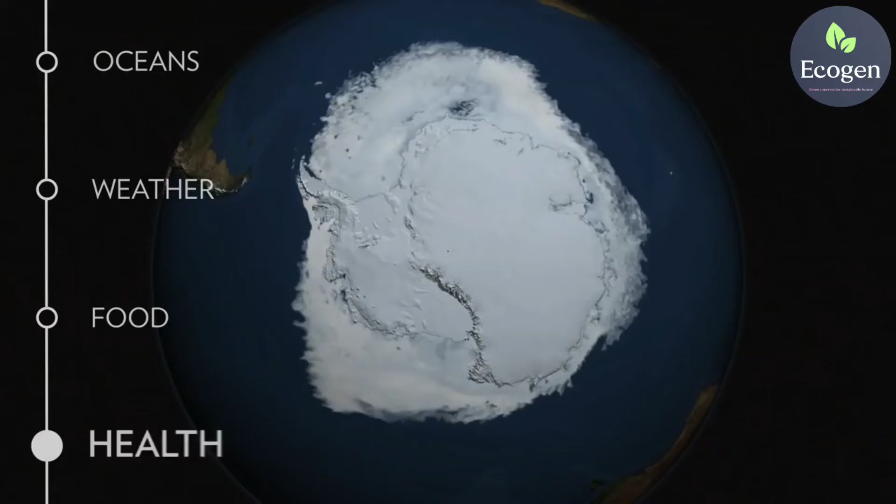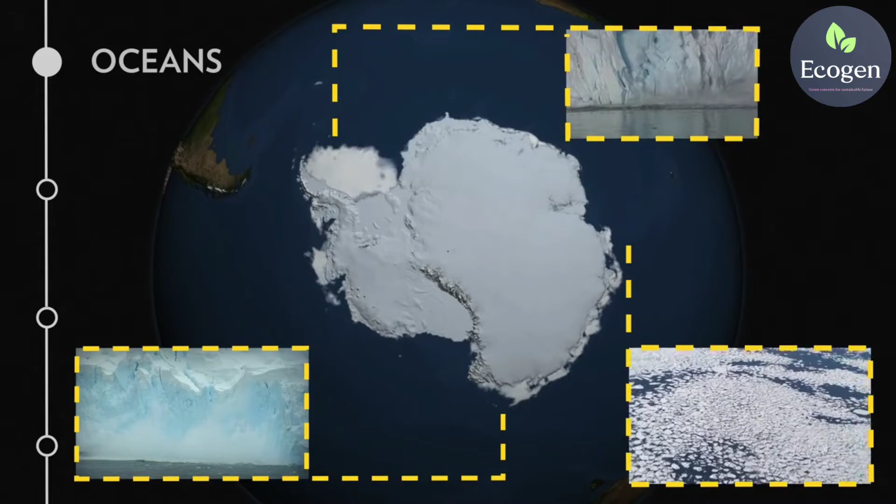Climate change has consequences for our oceans, weather, food sources and our health. Ice sheets such as Greenland and Antarctica are melting. The extra water that once was held in glaciers has caused the sea levels to rise and spill out of the ocean, flooding coastal regions.

Warmer temperatures also make weather more extreme. This means not only flooding but frequent droughts too. These changes in weather pose challenges. Growing crops becomes difficult. The areas where plants and animals can live shift, and water supplies are diminished.

Climate change can directly affect people's health. In urban areas, the warmer atmosphere creates an environment that traps and increases the amount of smog. Smog contains ozone particles that increase at high temperatures. Exposure to smog can cause asthma, heart disease, and lung cancer.

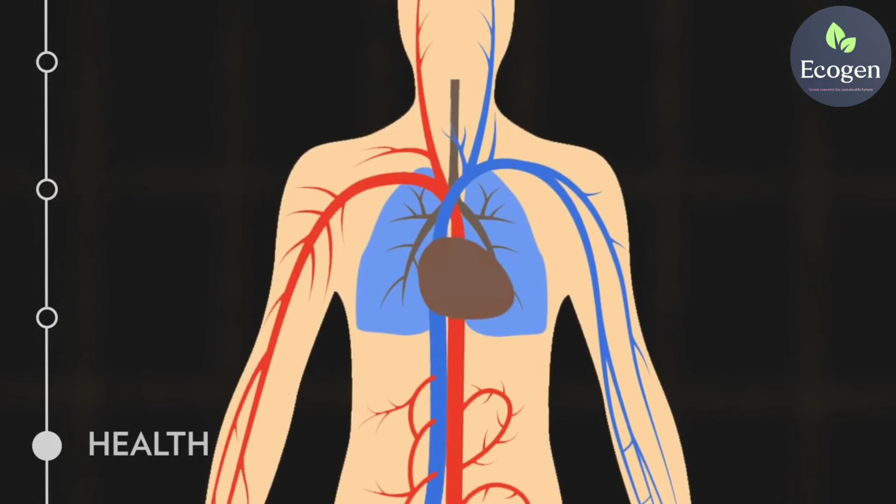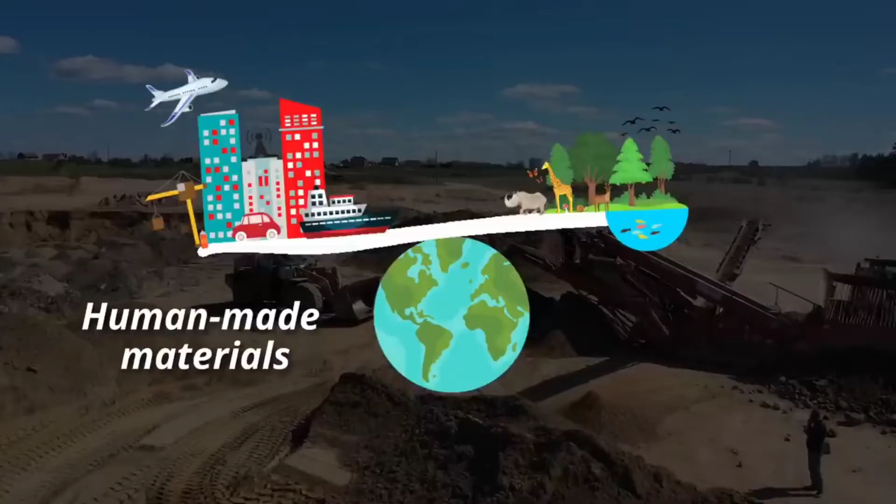A lot of measures are in place to reduce the dependency on fossil fuels and increase green energy consumption, but we haven't much talked about concrete. Concrete is present in all man-made structures and has exceeded the weight of all living organisms on the earth. Cement is considered the heart of concrete and it is responsible for nearly 8% of global carbon dioxide emissions.

Currently, Ecogen has developed mix designs based on the strength requirements. Grades of concrete of M90, M60, M40 have been achieved. Cement and sand are replaced by GGBFS and PS ball when mixed with alkali solution, which is a mixture of sodium hydroxide and sodium silicate.

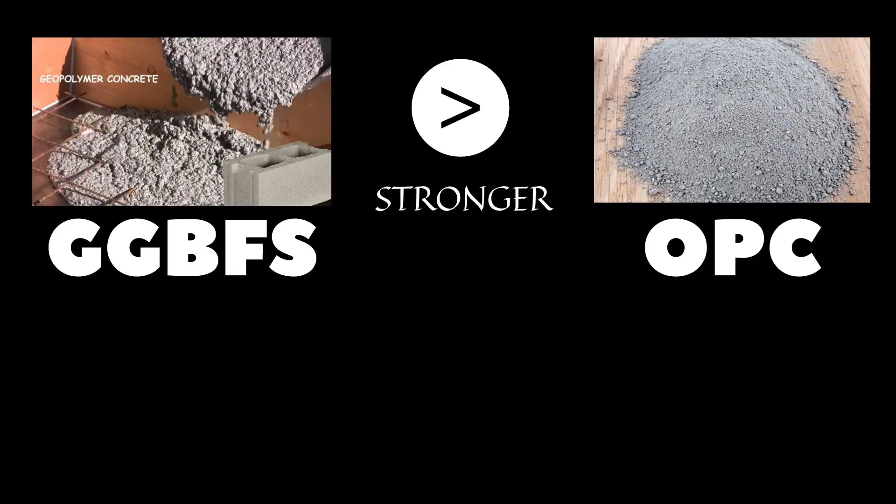GGBFS contains aluminosilicates. When the alkali solution is added, it transforms the aluminosilicate to a 3D network which is bonded by covalent bonds. This is the polymerization process, and that's why geopolymer concrete is stronger than OPC concrete.

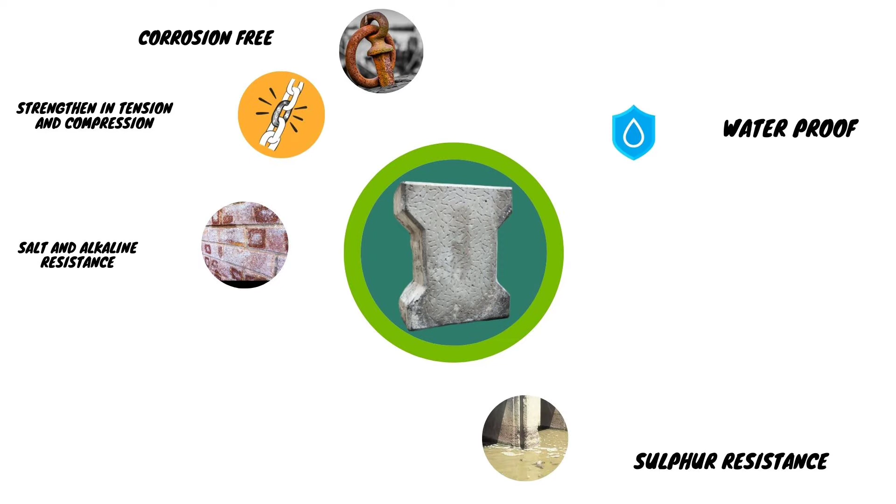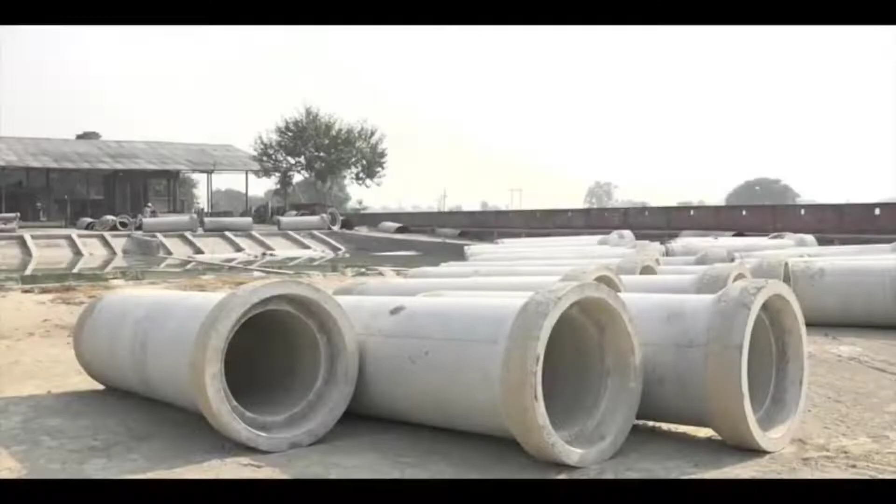Geopolymer concrete has high strength both in tension and compression, is corrosion resistant, alkaline and salts resistant, sulfur resistant, has better waterproof ability than OPC concrete, is heat resistant, has better durability, reduces carbon dioxide emission and mining dependency, and has a greater lifespan, making it a better candidate for sewage and chemical concrete pipes, coastal area protections, roads and pavers, railway sleepers and many more applications. Ecogen is trying to change the way the world looks upon geopolymer concrete.

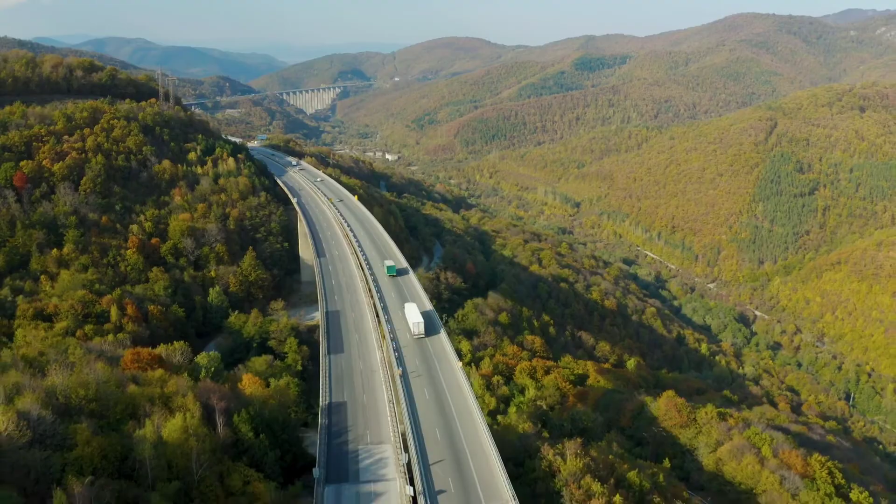We are currently focused on developing an MVP for roads and pavers. Ecogen is the winner of Elevate Call 2 2019 organized by KBITS and the Government of Karnataka and has secured a grant amount to develop a geopolymer product and a pilot project. The project has completed the Tranche 1 plan and the objectives were fulfilled: optimizing the mix design and also finding the optimum dosage of chemicals.

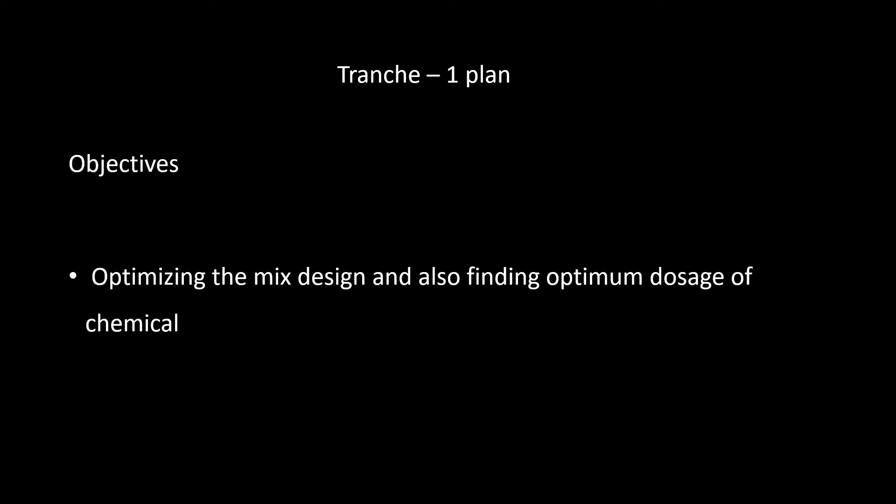This mix had a 3-day strength of 42.06 megapascals and 49.84 megapascals at 7 days. It was also tested for split tensile strength and flexural strength, for which we got around 2.23 megapascals and 3.11 megapascals. This data shows that the strength achievement of geopolymer concrete is 75% in 3 days, while conventional concrete takes 7 days to gain 70% of its strength.

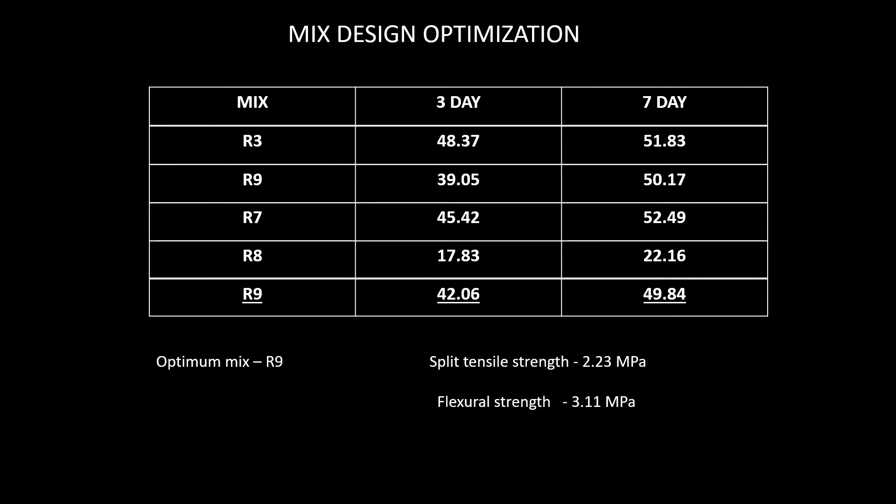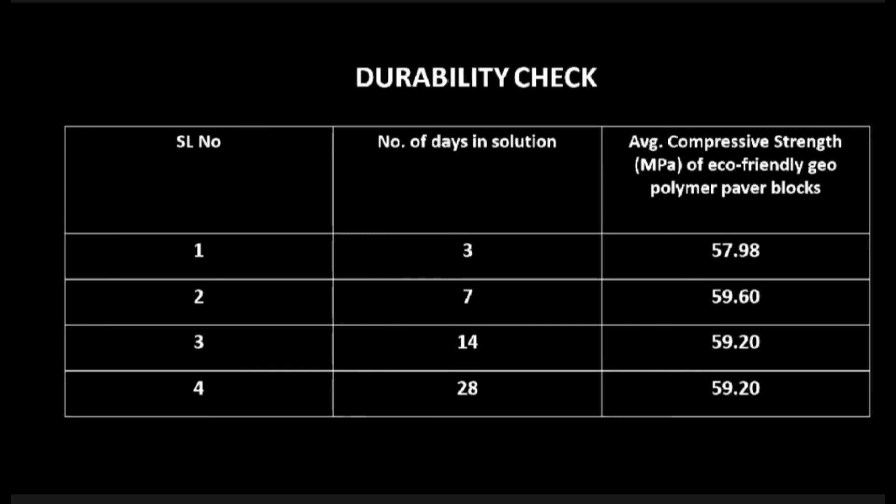A durability check was conducted, placing the GPC product immersed in a 5% MgSO4 magnesium sulfate solution, and the following results were obtained. For 3 days of immersion, the strength obtained was 57.98 megapascals, for 7 days it was 59.6 megapascals, and for 14 days and 28 days it was 59.2 megapascals.

We know concrete will be replaced, but when?